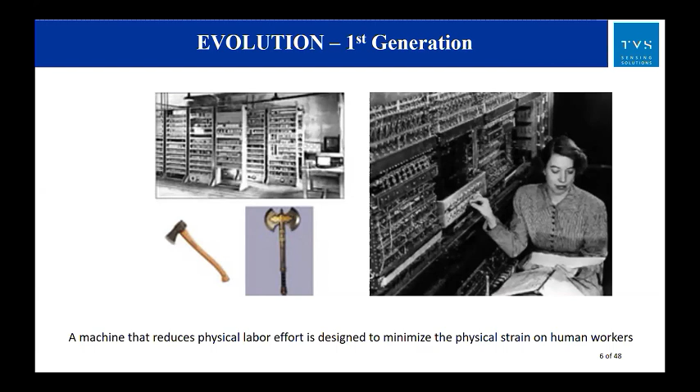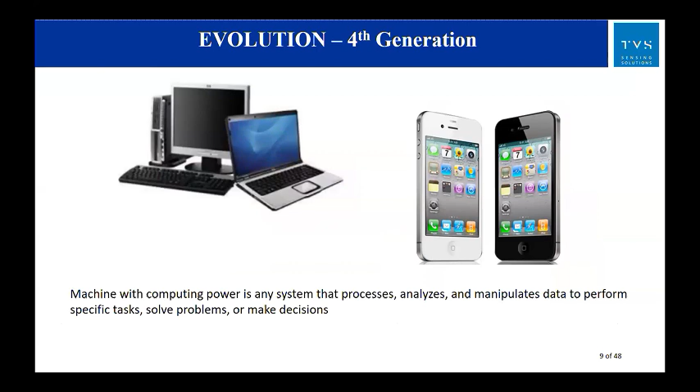Fourth generation, where we are very familiar with machines with computing power, is any system that processes, analyzes, and manipulates data to perform specific tasks, solve problems, and make decisions. I think I need not explain too much on this, we are all very familiar with this area.

Then comes the fifth generation, where intelligent machines are systems designed to mimic human-like cognitive functions. I think this is the era where we belong now. Slowly, things are now being taken over by more robotics, automation, AI, such kinds of things, right? So we are already seeing glimpses of them coming into practice.

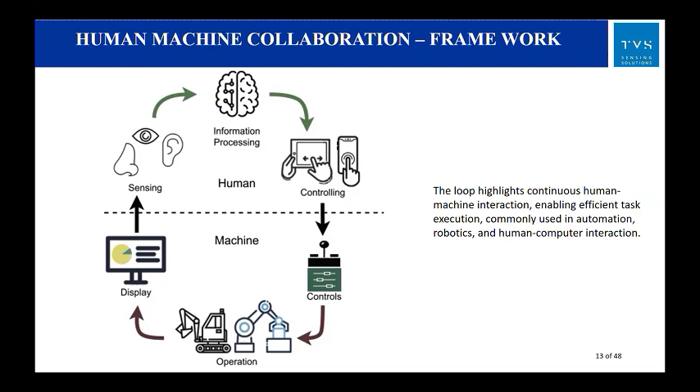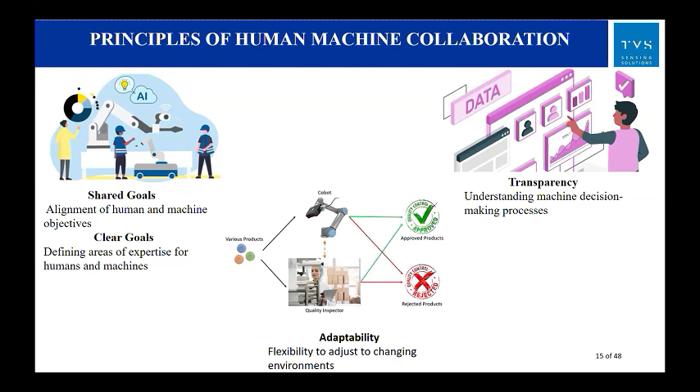In the second portion, we try to understand what HMI is today. We talked about the evolution of HMI, starting from human work, and how machines came in, which led to whatever today we have—all smartphones, touch phones. I think it all started with button phones, right? You would have seen button phones, and from there it changed, and now we are having smartphones in hand today. In future, this can be much more automated than what we are seeing today. This is on the evolution portion.

On the components and principle portion, what are the most important components? We talked about cyber physical systems, and cyber physical systems talk about first sensing, which is called the perception phase, carried out through sensors. Then there is a kind of analytics and other things happening. The third one is the intervention by way of either HMI or cobots, those kind of things.

And the basic principles for HMI, we have seen how the goals should be shared, and it should be transparent, and there should be a kind of alignment. That is very important. With this understanding, let us get into the collaboration of human machine interaction in the real world. I think it's very simple, because this subject is not rocket science. It already exists, and many of us go through it knowingly or unknowingly in our daily life. That's the advantage, so it is very easy to understand. Let us take some examples to understand it better—how does this collaboration of human machine interaction happen in society?

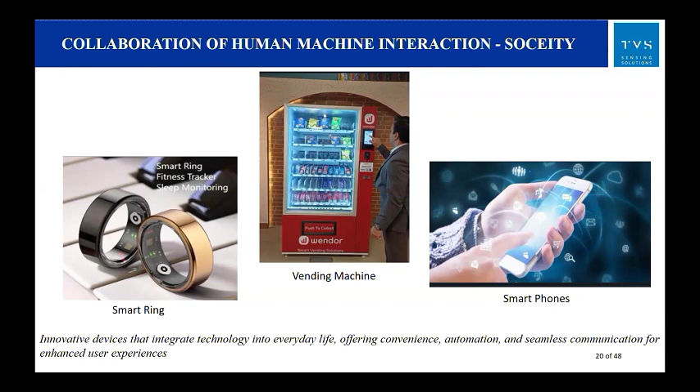Let us see some more. Already you see in Amazon, Google, this voice assistant that is happening. It's also available in cars nowadays. It's possible for you to have these apps, adaptive ATMs, and home automation devices.

There is a weighing scale available in the instrument itself, where by putting in all those ingredients by the quantity showing up on the screen, your complete cooking experience becomes automated. That's the kind of thing that is happening. Already you would have seen that in big restaurants and other places, many things have been automated.

Dosas, today you can print dosa, whatever size you want, you can print dosas. Those kinds of things are coming into picture. So, transform living spaces by enabling seamless control, automation, and interaction through voice commands and smart banking experience.

I think the majority of things I've talked about so far, we're already going through this experience without thinking of them as HMIs. We are going through them in our day-to-day life. I hope all of you agree with me.

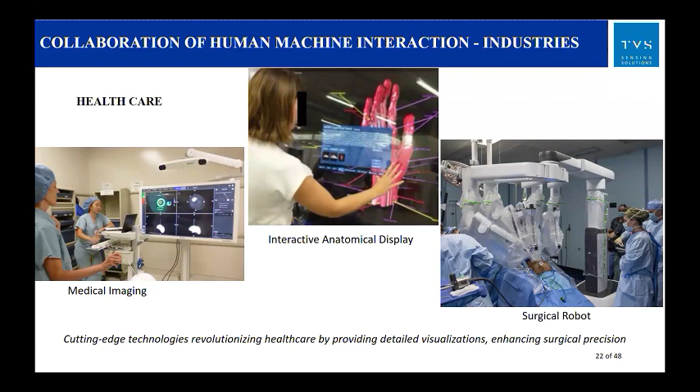Teaching assistance robots are available. This is becoming more and more prevalent in some countries. And I think in India also you would have seen in media this kind of teaching assistance robots coming into play.

Virtual meetings - I think the whole world has learned this post-COVID. The online thing has become part of our life. It has completely transformed the way meetings happen, the way product development happens. Everything changed with these virtual tools. So today we are also meeting through virtual sources. That's all done because of technology advancement.

So innovative technology is designed to enhance learning experience by providing very personalized guidance.

Quality check, augmented reality - in manufacturing now you can see haptics have come into play. For example, if 800 parts have to be assembled for an engine, training a new person for such assembly usually takes years to master. With the advent of haptics, it's possible to train all the assembly procedures, so the learning process becomes quick and as short as possible, so you can understand without even going there.

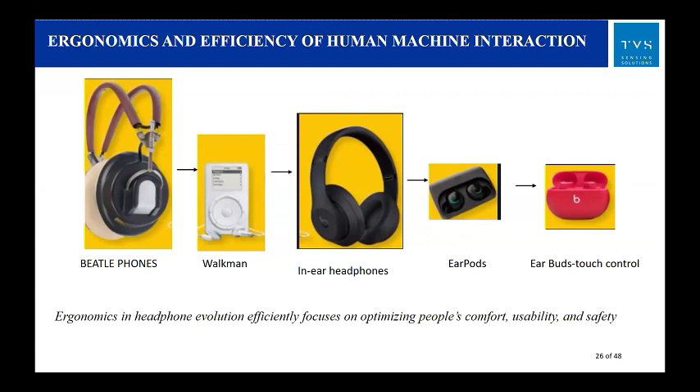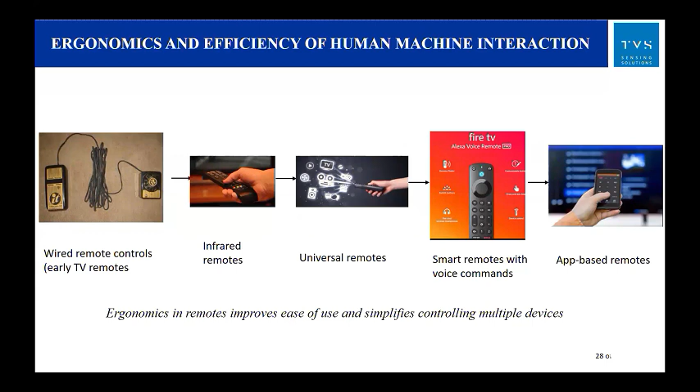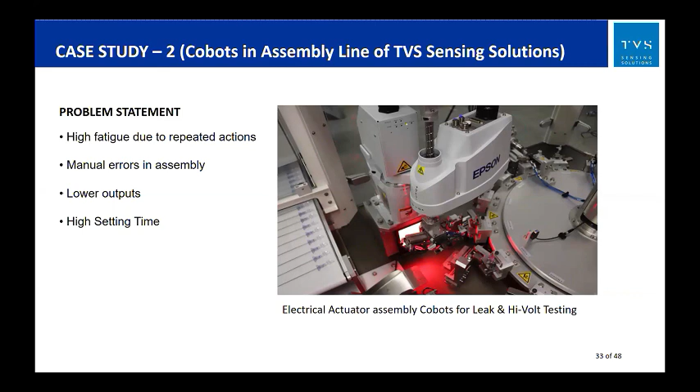So these leak testings have now started using human-machine collaboration. You can see them in the video.

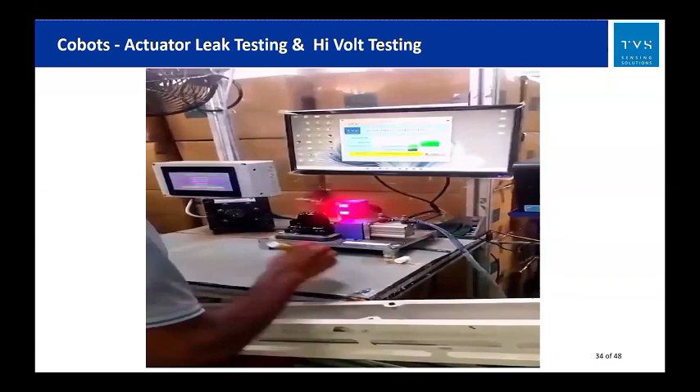This is an EOL tester finally that takes over - previously we used to have the problem of skipping one of those tests, and if that happens, it becomes a problem. Now with the application of these robots, we were able to get better productivity and consistency in output. That's the advantage we got.

We'll talk about one example of a case study related to safety. Nowadays shop floors are becoming more complicated and quite huge, so there are human movements and also vehicles that are moving.

Just like we have opportunities for accidents on the road, there's a possibility of such accidents happening within the industry workplace when vehicles and human beings are moving - there could be a possibility of collision. There are blind spots when you go through huge factories with many walkways, with 90-degree turns where you can't visualize ahead. You can keep mirrors and other things, but there's always a possibility of missing them and hitting humans.

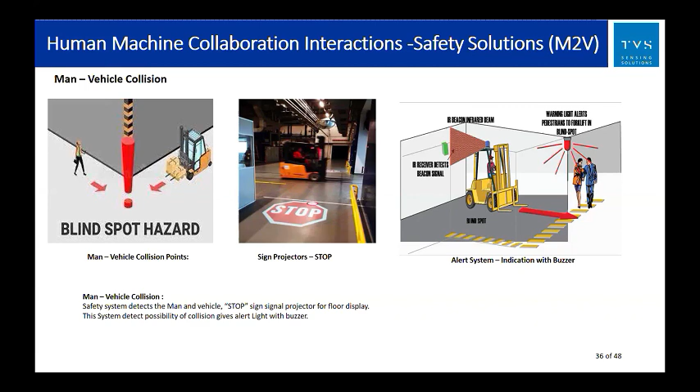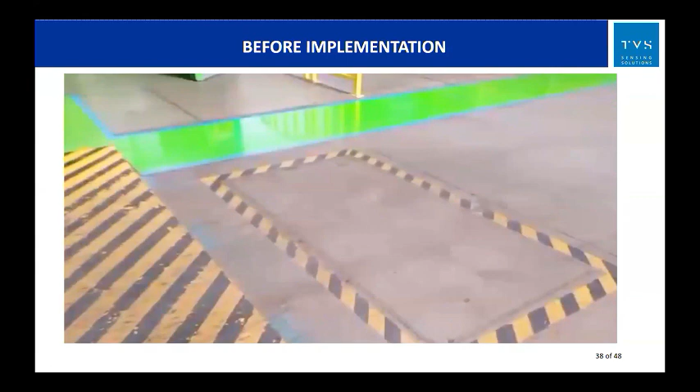Just to show you a very simple picture - this is before you put the alert system. You are moving towards a walkway - imagine you are a vehicle or human being moving on this walkway, and suddenly there is a vehicle coming from the other way. There is a possibility of getting into an accident. That's what happens before deploying this kind of system.

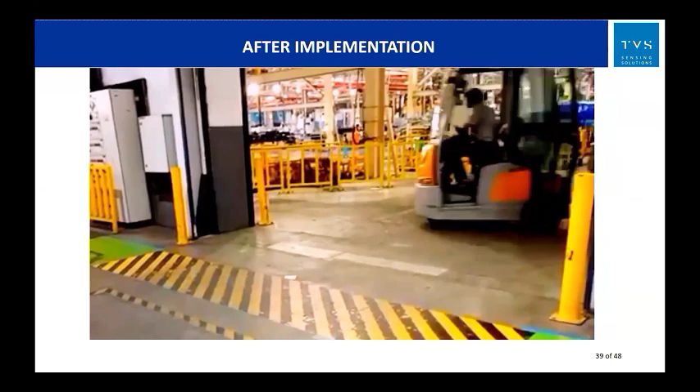Now, if you adapt a kind of human machine interface, you see here - I hope you noticed that when the vehicle is coming, even before you see it, there's a stop visual as well as an alarm that comes up, so that you stop and wait for the other vehicle to move first, then you can make the movement.

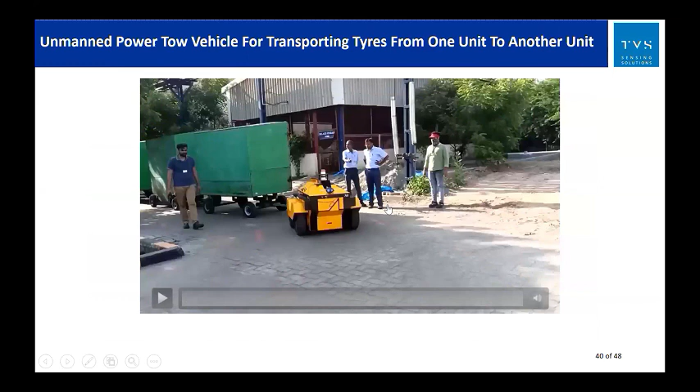There are some other videos being used, just for you to understand how automation is being used. Have you noticed? This is not human - this is manless.

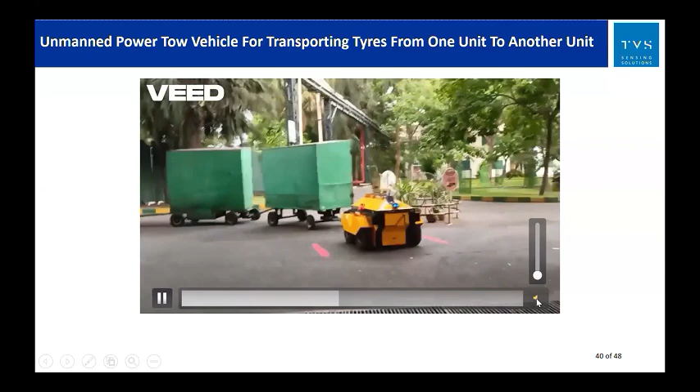You can see that this complete thing is now programmable, so that previously when you had to carry a lot of weight, either humans or vehicles had to carry it. Now all this can be guided automatically, that's the way it is.

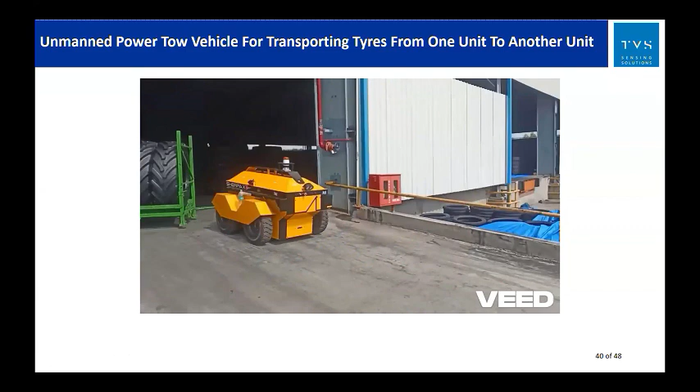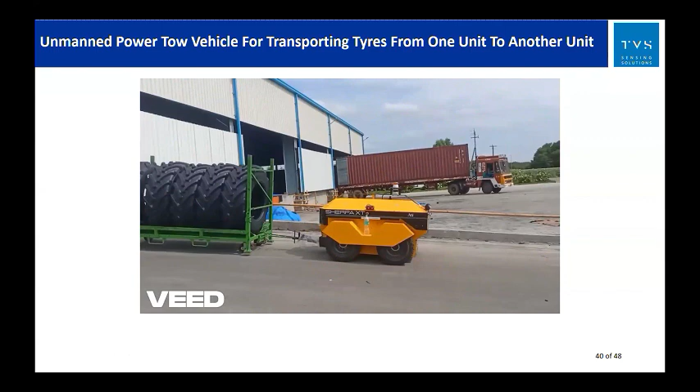It's very interesting that, as I said, wherever there are repetitive jobs as well as heavy weight - in this case these tires are very special, of huge weight. If they have to be carried, it has to be done by a vehicle only, not humans, not possible. But if they need to go from one place to another repetitively, then it is possible to deploy these programmed vehicles, which can go without human intervention - only programming is required, no intervention.

So in conclusion, you can see here how the transport system is taken care of through this kind of HMIs. There's VANET system - V2N vehicle to network, then vehicle to vehicle V2V, roadside units are available, and vehicle to pedestrian V2P. So all these things are being sensed.

So AI based vision systems can enhance industrial safety as well as road safety by detecting and preventing collisions between vehicles and humans in real time. The difference between automation and AI is that AI can explore all possible options simultaneously, and the best option in real time can be picked up and used. It ensures efficient operation by automatically alerting or intervening when potential hazards are detected.

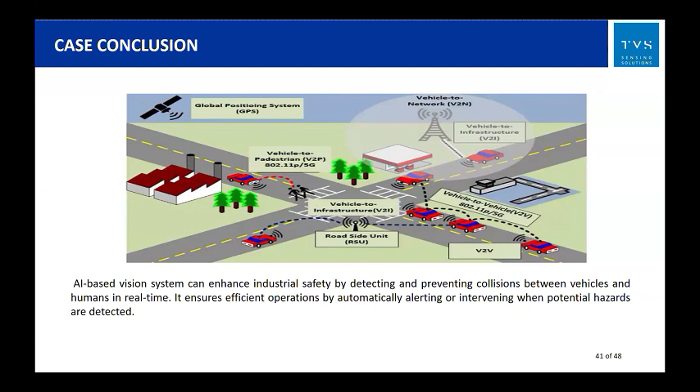I hope you found these case studies useful. Let me repeat: the subject we are talking about today is not rocket science. This has come into existence, and I will not say it has reached a matured state, because with the advent of AI, there is still huge scope available for automation. But for safety and repetitive jobs, HMIs have completely gone to a mature stage.

So what are the future works available in this space? Let us see. Innovation in Industry 4.0 has really created brain computer interfaces, gesture recognition is possible, haptics - with the movement, it's almost like virtual reality.

When we see virtual reality, you feel like you are in a game, you feel you are driving the car, and a similar kind of thing you can do in industrial operations. Assembly, without the machine before you, it's possible to visualize the machine and all assembly operations, and you'll be able to execute. That's what is called haptics.

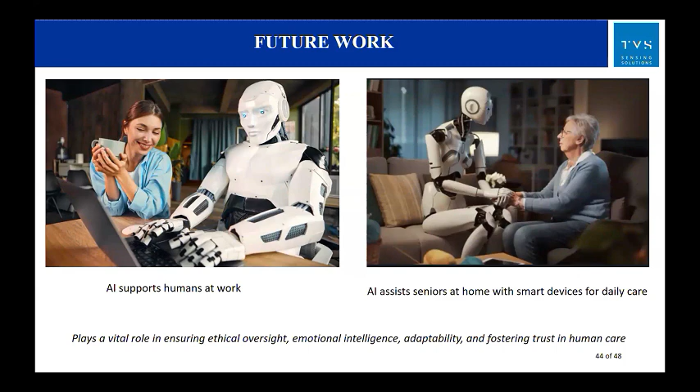This plays a very vital role in ensuring ethical oversight, emotional intelligence, adaptability, and fostering trust in human care.

Dependence on technology, and limitations - whenever we bring any system, there are pros and cons. Over-reliance can reduce critical thinking, and that's happening now. At least in our generation, we were able to remember phone numbers. Today people don't even remember phone numbers because we have them stored. If you misplace your smartphone, you feel miserable - immediately you feel cut off, unable to do anything.

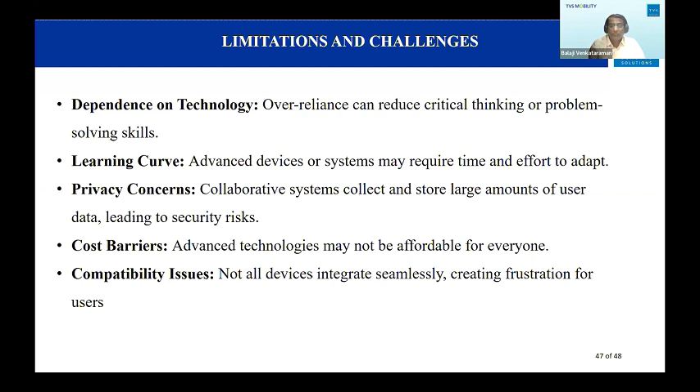I think this is a kind of short presentation now, that's what I have from my side. I'll be happy to take any questions. It's a simple subject - my intention was not to really get into the technology part, but more the application part, so we can understand what a human machine interface is and how it is being deployed into industries, especially.

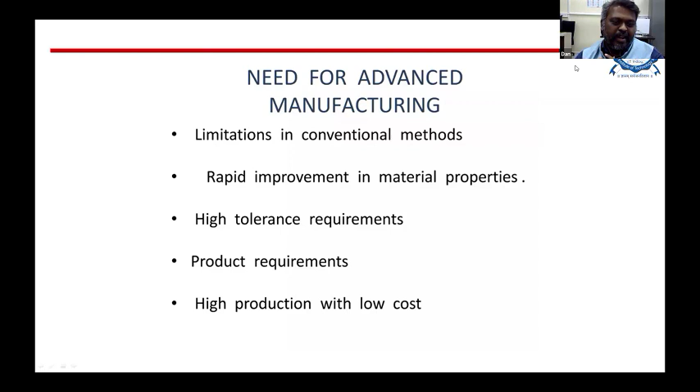So why go for advanced manufacturing? We know we have limitations in conventional methods - we need very high tolerance and product requirements. Also we need high production with low cost, so that's why people want to go for advanced manufacturing. Additive manufacturing is one of the advanced manufacturing processes to fabricate complex shapes.

It is called layer by layer deposition - we deposit the material by layer, then we can make any kind of complex shape. For that, first we need to start with design and idea. You design the component using CAD software - nowadays many CAD softwares are available to draw this. Whatever the model, the software itself converts it to machine language, then it is given to the 3D printer, which directly prints whatever component we want. We have design freedom, and whatever complex shape we want we can easily make it layer by layer.

Nowadays almost any material can be processed by 3D printing. This is the broad classification of additive manufacturing technology. Based on raw material, we can make three different groups: liquid based, solid based, and powder based. In liquid based, mostly polymers and plastics come under this. Again in liquid based there are two types: melting and polymerization. Based on polymerization, there are technologies like stereolithography, polyjet - these are certain 3D printing technologies.

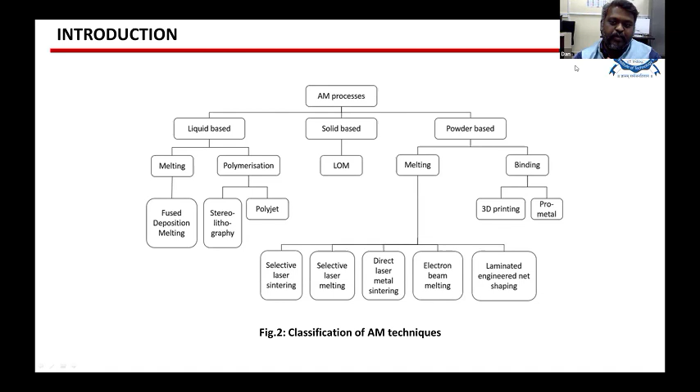If you come to solid based, LOM is there. If you come to powder based, in case of melting there are different techniques - all related to laser, like selective laser sintering, selective laser melting, direct laser metal sintering, and electron beam melting. These all come under powder based processes, and binding also we can do that. So these are certain classifications.

Why we have to go for additive manufacturing is it is one of the key components, one of the pillars for Industry 4.0, because it produces very less weight, the wastage of material is very less in additive manufacturing, and also we can decrease the prototyping time and cost. Also it may promote business digitalization. We can synthesize the assembly - no need of assembly process, we can make it a single part out of it. So these are certain advantages.

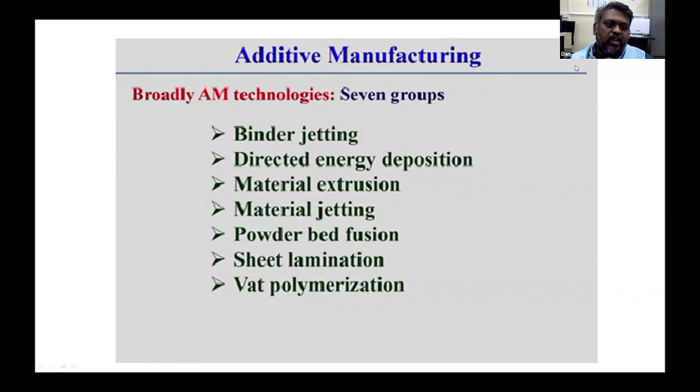These are the broad classifications of additive manufacturing. We have 7 technologies, 7 groups. If you take the first 4, mostly polymers are used, like binder jetting, material jetting - these are all polymers people may use. In case of directed energy deposition, people may use powder based or wire based - both kinds of raw material we can use in directed energy deposition. I'm going to briefly tell you the meaning of this, where we will use this kind of additive manufacturing technologies, then I will show the process. These are certain technologies like powder bed fusion, sheet lamination, vat polymerization.

Stereolithography mainly comes under the liquid classification. Here we use photopolymer resins. The laser falls directly on the resin, curing the material, which then becomes solid. In this way, layer by layer, you cure the material and make any component out of it.

In case of powder-based systems, there are many techniques. One of the most popular is the laser sintering method. You can use any kind of powder here, but the size of the powder should be in micrometers and in a globular shape. Only then can it flow through the nozzle, so layer by layer you can deposit it on the bed.

You can use a variety of materials in laser sintering, such as titanium or polyamide, or any raw material available in loose powder form, which you can use as powder-based fusion or sintering.

In material jetting, it looks like a printing machine, similar to an inkjet printer. It distributes melted droplets of material. Photosensitive material is deposited, then solidified using ultraviolet light. These thermoset photopolymers are used in material jetting.

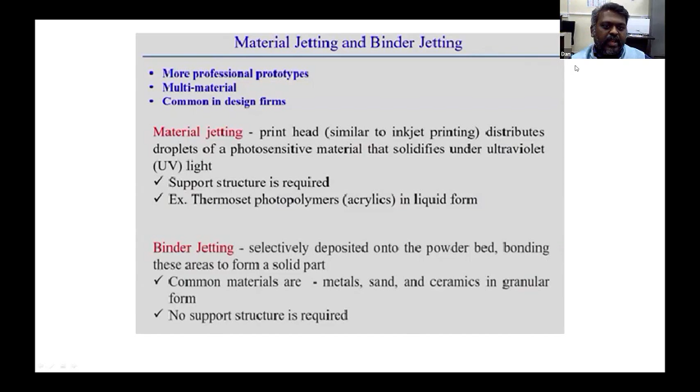In directed energy deposition, there are many classifications, like powder-based processes, and wire arc additive manufacturing also comes under directed energy deposition. You may use a powder or wire as raw material. You have to melt the powder or wire in order to deposit it, so you can use a laser as a direct source or an electron beam. This will melt it and then sinter the layer onto a substrate.

The powder deposition is synchronized with the available heat source, such as a laser or electron beam acting as the heat source. Here we don't need a powder bed fusion setup; instead, the material passes through the nozzle, completely melts, and deposits over any kind of substrate.

If you go for fusion-based techniques like powder bed fusion, you have to take powder in a bed, so a lot of powder is needed for deposition. That is the advantage of directed energy deposition, since it doesn't require as much powder.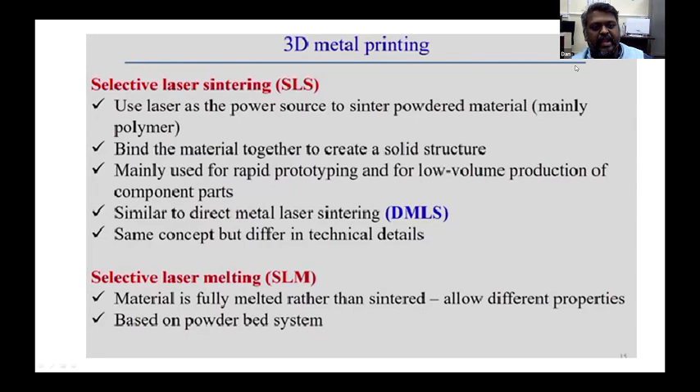In sintering, people don't melt the sample, but in selective laser melting, they do melt it and then deposit it—that's the main difference. In fused deposition, again people don't completely melt the sample; here also the sintering process happens.

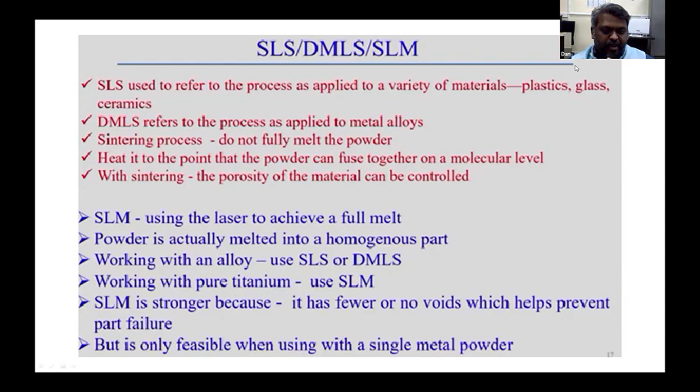In direct metal deposition, you can take material in powder form, pass it through the nozzle, and deposit it. These are all the different types of additive manufacturing technologies.

Wire arc is also one example of direct energy deposition, as already mentioned. In this case, instead of powder, we send wire through a particular feeder, and you can choose any kind of diameter of the wire.

The diameter of the wire can vary between 1 to 3 mm. Based on that, your bead size will differ. I will show it in the next slides.

The advantage of this WAM is basically the deposition rate is very high, and also you can use any kind of robotic arm or machine-based tool. So in that sense, the bed will be very large, and you can do very large components. What I try to say is very large diameter or large sized components can be easily printed in WAM. Also the lead time can be reduced, material efficiency is good, and porosity will be very less as compared to the powder based process. That is the advantage of WAM.

In WAM, what kind of technology do they use? I hope you know the basics of welding. They use the concept where the heat source will be the welding source, generating the arc using electric current, or using some kind of TIG based system or MIG based system. So those kind of things you can use as a source, so you can melt the particular wire and then deposit it over any kind of substrate.

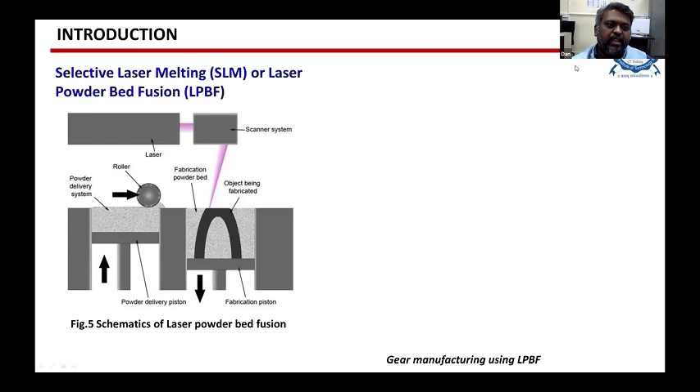So what is laser powder bed fusion or selective laser melting? Here you see the powder is kept in the bed. All of this is the same process. Suppose here they are manufacturing a gear.

You see here all the raw material is powder, kept in the bed. Over it, the sintering process is happening layer by layer. After each layer deposition, the bed goes down, keep on adding layers - it's something like a piston cylinder assembly, the piston going down. Then finally we could make a gear out of it.

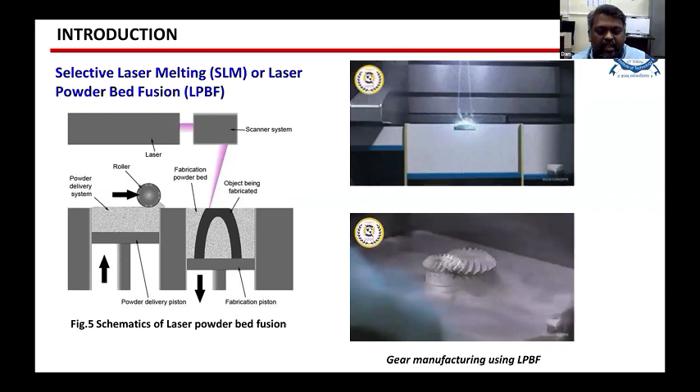So for that we need a large amount of powder in this particular bed - at least 2 kg or 3 kg of powder we have to fill in the bed, in case of powder bed fusion or selective laser melting process.

Basically we use two types of process, TIG based or MIG based. TIG based means tungsten inert gas welding, so tungsten case means the tungsten will act as an electrode, and the raw material will flow from the outside.

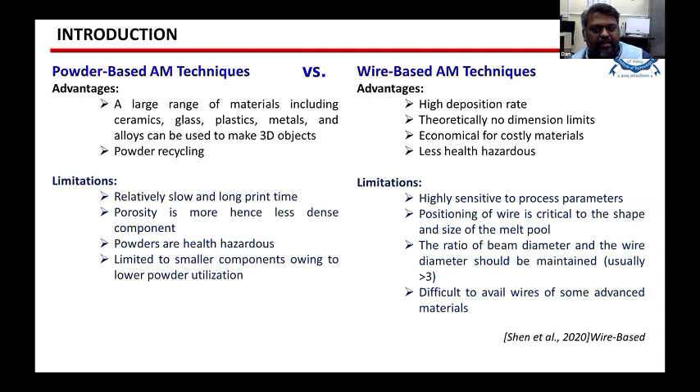Nowadays a lot of materials are available for additive manufacturing, and people are focusing on many different alloys. For example, still people are looking for nickel super alloys, mainly used for high temperature applications. For automobile or aerospace applications, aluminum alloys, titanium alloys, and stainless steel alloys are really popular, and people are still working on these in additive manufacturing. People are also working on high entropy alloys, or multi-component alloys. So in case of metals and alloys, people are really focusing there.

In case of smart materials, mostly people are focusing on piezoelectric materials or shape memory alloys, or some civil structures. People are making 3D printing of homes - nowadays we can create concrete structures and print them directly by 3D printing to make a house. I think IIT Madras made one office room by 3D printing concrete, one of the buildings. It's also very popular in hydraulics and electronics, where people are trying to make multi-material printing connectivities. That's all they are trying in additive manufacturing.

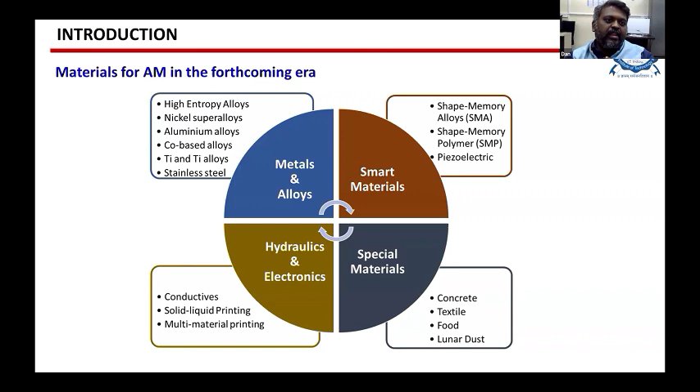Now coming to why we go for advanced materials in additive manufacturing - what is the use of multi-component alloys? I'll present this because I'm mostly going to talk about multi-component alloys. Basically, if you take any conventional alloy, it's mainly based on one dominant element. For example, if you take steel, iron will be the major proportion, and it may have other components like magnesium, manganese, or carbon in minor proportion. So mostly in conventional alloys, one or two materials act as principal or dominant elements, and remaining elements are added to enhance particular properties.

But in case of multi-component alloy, all the elements act as principal elements. For example, suppose you're taking a four or five component alloy - cobalt, chromium, iron, manganese, nickel - this is five components. If all are near 20 percentage each, that is called a high entropy alloy. Usually these alloys have five or more principal elements.

This atomic percentage can vary between 5 to 35%. Initially people said it should be near equiatomic, meaning if you're taking five components, each should be 20%. But in order to enhance design flexibility, people tried making it so if each component is between 5 to 35%, it is called high entropy.

So this is the basic guideline. I can also show you about...

I already told that if you increase configurational entropy, that decreases Gibbs free energy. Because of that, it forms very simple structures. You may expect multiple crystal structures in a multi-component system, but usually these multi-component alloys give very simple, stable structures like BCC, FCC, or different kinds of FCC or B2 phase. Because of this stable structure, we get very different properties from this particular alloy, due to core effects compared to conventional alloys.

So I already told about this configurational entropy effect, and how it stabilizes the structure.

Next, when you mix many elements, the atomic sizes are different - each element has a different atomic size. This usually gives a very distorted or strained lattice in the system, and because of this strain, the strength of the system increases.

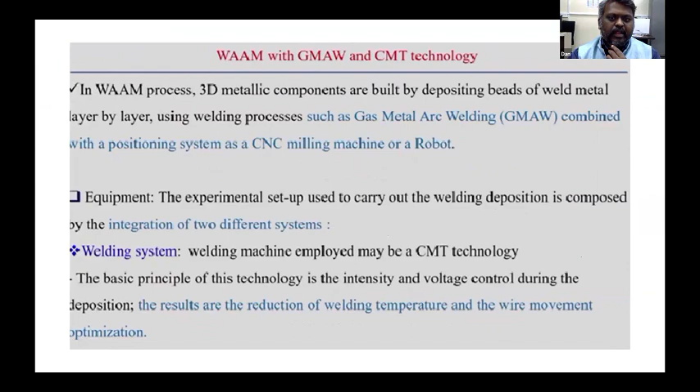So I hope you got some idea about what is high entropy, right? I think up to this it is visible, and I hope you got the idea about what high entropy is.

It is nothing but what I try to say - a multi-component alloy. Why it is very popular nowadays is that these alloys form a very stable structure and also a particular crystal system. Because of that, you can easily improve the property of this particular alloy. I also told about certain core effects - compared to other conventional alloys, it has certain inherent properties, so you can get very good structural and functional properties out of it. That's what I try to say.

Now coming to our own work - we are not working with this 5 component system. We wanted to go down a little and start with the medium entropy alloy. Medium entropy means we have taken 3 components - cobalt, chromium, nickel - in equiatomic proportion. Then we tried to see this property, and this alloy is really popular because it gives better properties than some 5 component alloys. That's why we tried to manufacture this particular alloy through the additive manufacturing process.

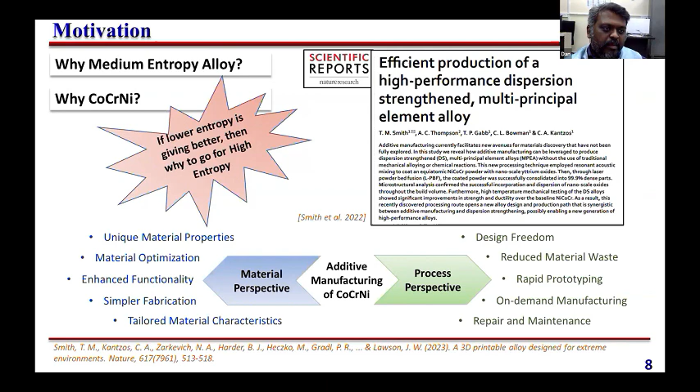Okay, I will show the laser-based direct energy deposition process we did in this particular alloy. I would like to show that study.

So why we started this alloy: when we began the work, mostly people studied only this 5 component alloy, trying to deposit it through additive manufacturing. They tried cobalt, chromium, iron, nickel, manganese based HEA, or other 4 component systems. They understood certain mechanisms, but still a large gap remained. They only studied the as-deposited sample and never did any process parameter changes or studied mechanical properties in depth.

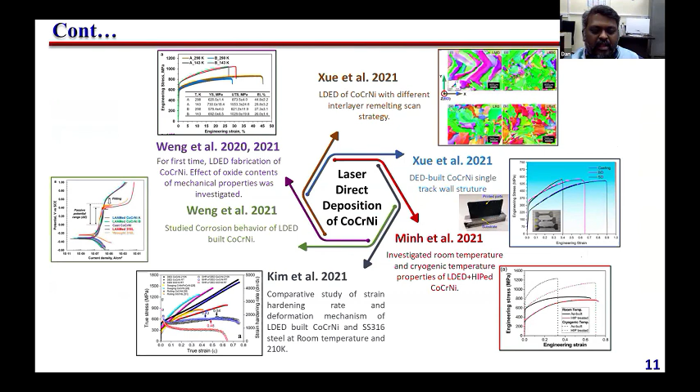So from that point of view we started this particular research. Basically, they never changed any process parameter, and never did any modification in the alloy system. For example, you can vary the composition by changing the atomic proportion, but people never studied this.

Also people never looked into post processing techniques. If you go with additive manufacturing, usually you have to do some post processing like heat treatment or surface modification, because usually you won't get a smooth surface after additive manufacturing - you have to process it. People also never studied corrosion properties or corrosion fatigue. So from that point of view, we started this work.

So this is basically our research objective for this particular alloy. We tried to optimize the process parameter through the LDED process. We did microstructural and nano indentation studies. At the macro level, we did microstructural study by SEM, TEM, EBSD - these characterization techniques - and also at the nano level, we did nano indentation study.

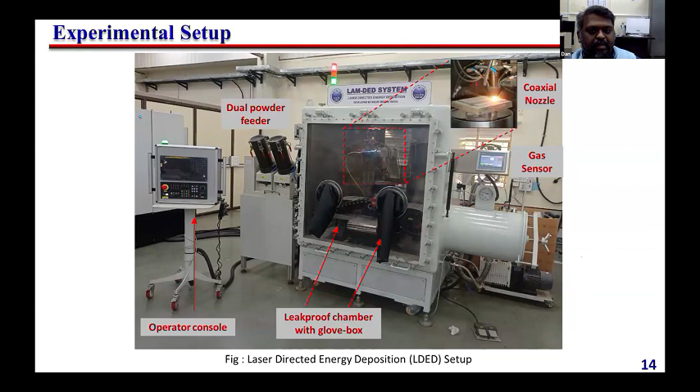Now coming to how we did the deposition: initially we pre-mixed all this powder - we took cobalt, chromium and nickel, these three powders, and you can see it is in spherical shape. We took it in a near equiatomic proportion, each around 33 percent. All the powders are around 50 micrometers in size.

These are all the parameters we used. There are different laser powers we tried, and also different scan speeds in the DED system. We varied between 700 to 900 watt, and scan speed we kept between 0.3 to 0.7. The remaining parameters like powder feed rate, gas flow rate, and stand-off distance we kept very similar.

This is the first raw material we have taken as a powder. Then we deposited it. As I mentioned, we vary the laser power between 700 to 1000 watt, and also vary the scan speed. This is basically deposited over the substrate as this particular sample.

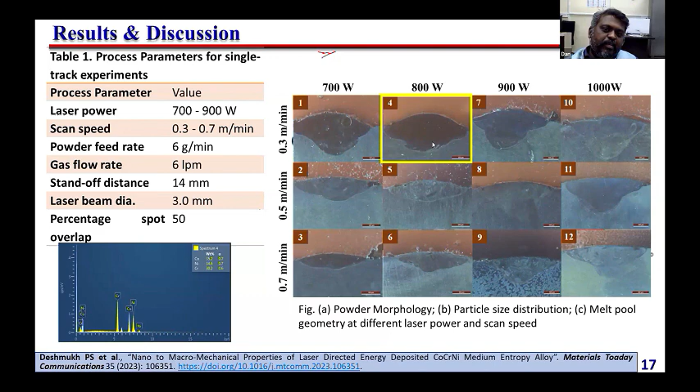Here you can see the bead of this particular deposited sample. Based on the porosity and the bead height aspect ratio, we decided that this fourth parameter is giving better bead height and width, and also lower porosity levels. So that particular laser power and scan speed we used for the deposition.

We deposited layer by layer, and could deposit at least 20 to 30 layers. We also took samples in different directions, which we call the scanning direction and the building direction. Along both directions, we characterized the microstructure by EBSD.

When we look at the EBSD, what we understood is that in the scanning direction, in most cases the grains are elongated, with a very coarse structure. But in the building direction, almost all the grains are columnar, grown epitaxially, and interestingly the texture is really very different.

In the building direction, the texture shows almost the same color, meaning all the grains are oriented in a similar orientation. This texture will also play a very important role in the structural or functional properties.

Hope you may study it. So here the texture is really very uniform. Sometimes we need a specific texture.

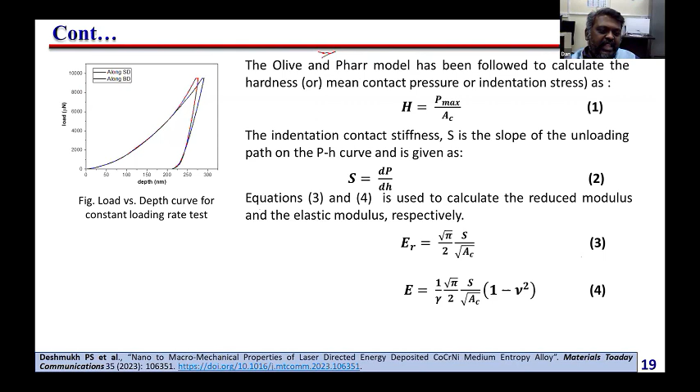So that's what we get in the as-deposited sample. The building direction gives a very coarse structure with epitaxial grain growth. Now we try to see inside the grains, through nanoindentation.

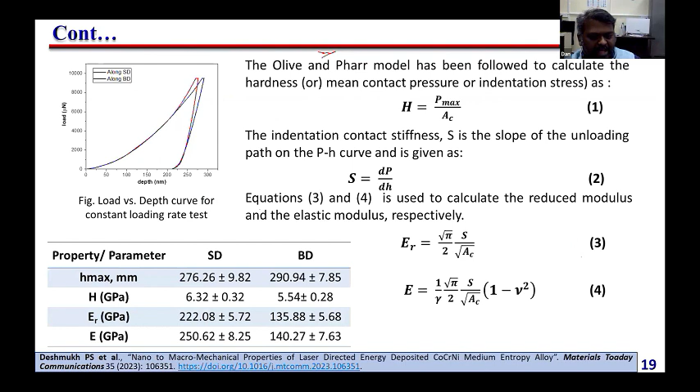We did nanoindentation to see the hardness property. It is not varying much with respect to different strain rates, or with respect to different directions like scanning or building direction. It is something like 280 and 290, not much difference. We got almost similar results.

We also tried the strain rate difference in hardness, and we are not seeing much difference. The strain rate sensitivity is much less, around 0.04 or 0.03, which is very typical for this multi-component alloy. Usually such alloys show very low strain rate sensitivity, and the activation volume is also very low. For conventional alloys, this activation volume is in the range of thousands of B-cube, but for high entropy alloys, it's in the range of 100, which is what we observed in this medium entropy alloy too.

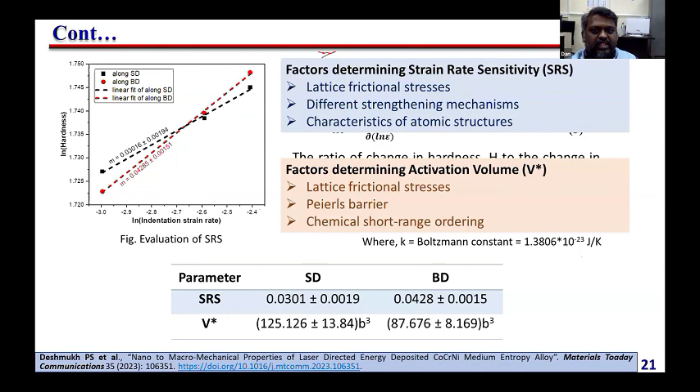These factors mainly contribute to this, which we determine from the outcome of strain rate sensitivity and activation volume. Basically, the chemical short range ordering in this alloy plays an important role, along with Peierls barrier and lattice friction stress. These are all things playing an important role, which is why we get a very low activation volume.

From this particular deposition, we could optimize the laser power and scan speed for this sample, and we understood that there is a predominantly preferred 001 texture in the building direction.

That is mainly due to the thermal gradient, because layer by layer when we are going, the heat will keep on accumulating. That will create some kind of thermal gradient, and that's why it leads to the epitaxial grain growth mechanism.

We also did some nanoindentation, so we got this strain rate sensitivity and lower activation volume. The reason is mainly due to short range ordering, right? So that's what I told. This is from the first study we got.

So now for the second study, our objective is to change this scan pattern. We try to rotate the scan pattern. Like in the previous case, the scan rotation was not changed - it was at 0 degrees, meaning layer by layer it would deposit in a similar orientation. But in this case, the scan pattern will rotate.

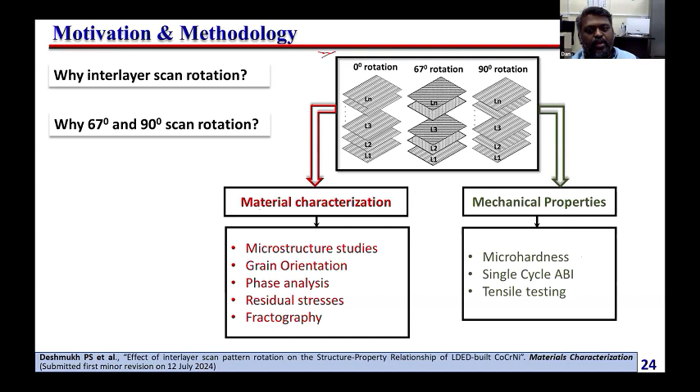We did it in 3 different conditions. We rotated the scan, which is called interlayer scan rotation. We used 67 degree rotation and 90-degree rotation. After one deposition, suppose 90-degree rotation means the second deposition will be rotated by 90 degrees, so each deposition keeps rotating by 90. So the cooling rates will change.

Basically the thermal gradient won't be affected the same way. Our main objective is how we can reduce this epitaxial grain growth. Even the substructure shows too much epitaxial grain growth.

So when we did this 0, 90 and 67, we understood that the 67-degree is the best. The 67 is giving a very fine structure compared to 0 and 90-degree. We did multiple images and tried to measure this substructure. We understood that the finer structure we got is in the 67 degree, and the epitaxial growth is also suppressed or reduced in the 67 degree scan rotation.

Also if you see the EBSD, we can understand the microstructure and texture. Already I told, for the first case, the 001 texture is forming as preferred orientation, but 67 and 90 form a very refined structure compared to 0. 67 and 90 have a very refined microstructure. Also the texture is quite different - there is no strong texture forming, and different kinds of 111 or 101 fiber components were found.

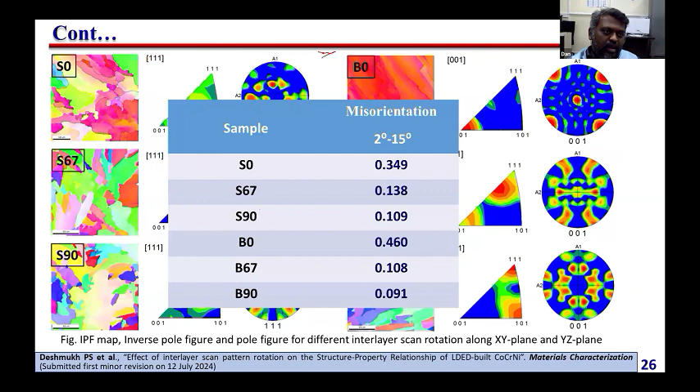These are all the misorientations. The misorientation is also less compared to the 0 degree rotation. Already I told the cooling rates are much better, so that's why the misorientation is reduced here.

We also did some phase analysis. In all cases, it is forming an FCC structure. There is no change in any phase - it is forming a single phase FCC.

We also did some kind of automated ball indentation test, something like a hardness test only, so you can understand how much maximum energy is absorbed in the particular sample. We can understand this by using this ABI.

Usually this 67 is giving almost a similar kind of energy absorbed compared to other orientations. For the 0 degree, there is too much difference in the displacement. That's what we understood.

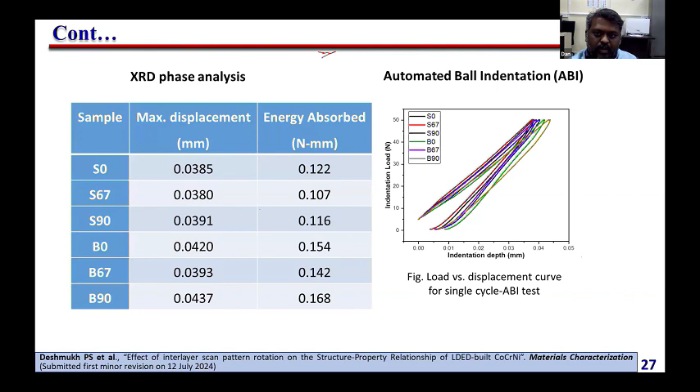Also if you take the mechanical properties, for example in the scanning direction versus building direction, it is totally different. In case of scanning direction, it gives better yield strength, but ductility is very less. In case of building direction, the ductility is much higher, but strength is less.

If you go for 67 and 90, in almost all cases the strength is increasing. The 67 gives better results, even 90 gives better strength, but in terms of isotropic property, the 67 is giving better results. So we are getting better results from the 67 sample.

So by using this different scan strategy, what we understood is we could control the microstructure and texture both.

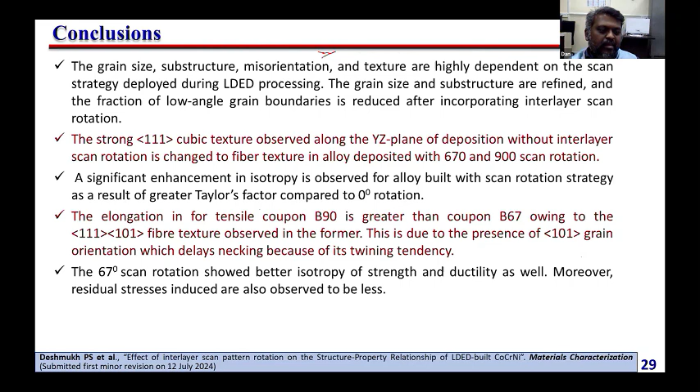These columnar grains are totally reduced in the 67 degree scan rotation, and we were also able to change the texture. In B90 we observe the 111-101 fiber texture, or other fiber textures, but there is no strong cubic texture present in the 67 sample. So basically this 67 scan rotation gives better strength and ductility compared to the other cases. Okay, that's what we understood.

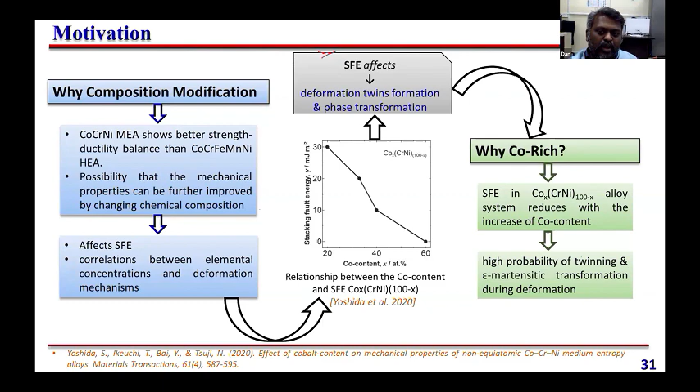In the final, third case, we try to change the composition. We try to see how changing the cobalt content affects the microstructure, texture, and properties in this laser additive sample. We wanted to study cobalt addition because changing cobalt varies the stacking fault energy of the sample. When you change the stacking fault energy, the probability of twinning and some kind of phase transformation happens during deformation. That's why there is a high probability of twinning and martensitic transformation when you go with a cobalt-rich sample.

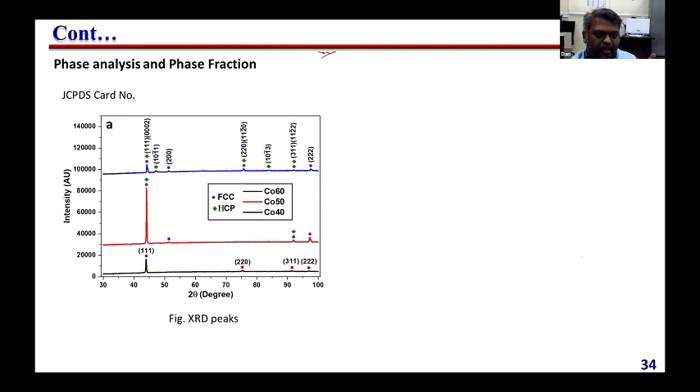That's why we tried to increase cobalt up to 60%. In the equiatomic case it is 33%, but we wanted to go for 40, 50, 60. When you increase the cobalt content, there is a complete transition in the substructure. When you increase to 60%, the substructure is totally refined, down to a few micrometers. Also, as you increase this composition, other phases appear, like martensitic phases evolving at 50% and 60%, while up to 40% it remains single phase FCC.

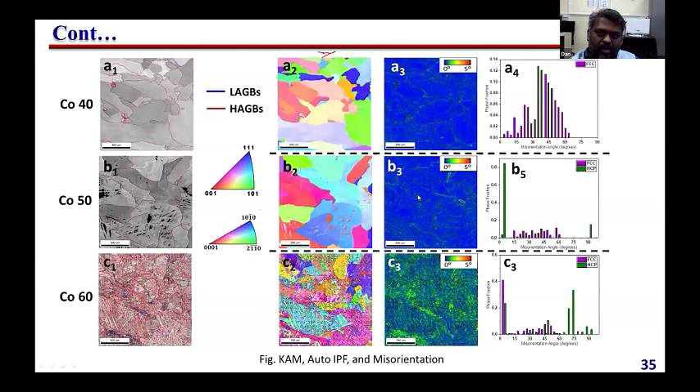We also separated out the different phases to see how the texture changes in each phase and what kind of texture forms. We did all this texture study, and we also looked at the properties.

When you increase this cobalt proportion, usually the strength is enhanced, but at the same time the ductility goes down. The equiatomic 33% composition gives better ductility with good strength. At 40%, the strength is really good compared to equiatomic, but the ductility drops. At 50 and 60%, even though you might expect very high strength, you get very low ductility, and the samples end up breaking.

The samples are broken, mainly because of this transformation. The martensitic transformation is basically dominating, and because of that, the samples don't behave like a ductile material. You can also see this in the fractography images, which we took after the tensile test.

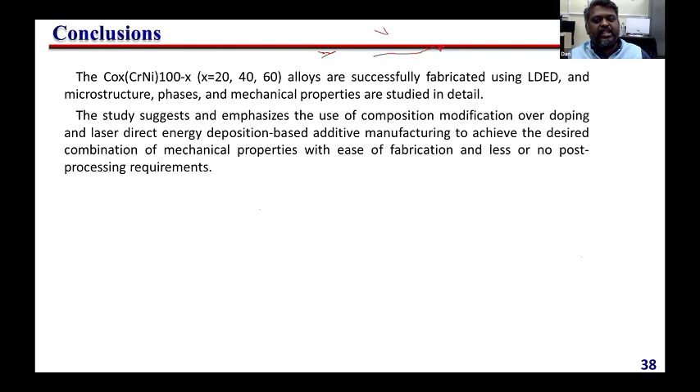So by using this compositional modification along with this advanced manufacturing technique, we can combine both to improve the mechanical properties with ease of fabrication, and there is no need for further post-processing. That is the advantage of this compositional modification.

Now I'm coming to the fourth study: laser shock peening. Before going into that, you should know what laser shock peening is. I need to show certain images so you can understand how this laser peening works.

Okay, I hope it is there. So what is the basic phenomena that will happen here?

Suppose the laser beam is bombarded over your particular sample, that will give some kind of high energy plasma. This laser beam will give a high energy plasma, and when it hits or bombards the material, it will convert into a very high energy shock wave that induces into the particular material. Because of that, it may refine the material, or it can cause phase transformation also. Mostly it will induce a microstructural refinement. So that is the main idea of doing laser shock peening.

There are some other methods also. People use this SMAT process, the mechanical attrition process, where they use steel balls to bombard over the surface, then they induce a shock wave. Like that, here we are using a laser beam, high energy plasma, then converting this high energy plasma into a shock wave, then refining the structure.

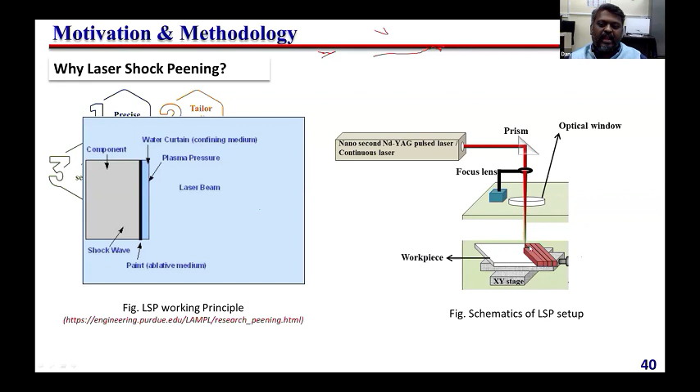For this purpose, basically an Nd-YAG pulse laser is used here. By using this, we can automate this process also. Suppose if you have the CNC stage or XY stage, you can move the sample with respect to XY direction, then layer by layer you can do the peening. So that's what it is, basically to modify the surface property.

So here basically we did some different kinds of shock peening. Before going to the result, maybe I should show what kind of mechanism will happen.

Then you may understand about this, how we can... Are you able to see this slide? Any of you please tell me. Yes sir, but it has to be in view mode, slide show mode.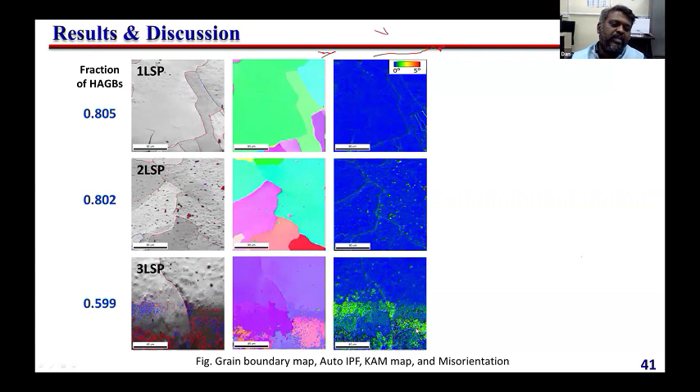When you go with two LSP cycles, some dots appear, which is basically a refined structure. But when you go to the third, three cycles of LSP, a large amount of low angle boundaries are formed, meaning there is large refinement and strain formed. Because of that, we could get a different property out of it.

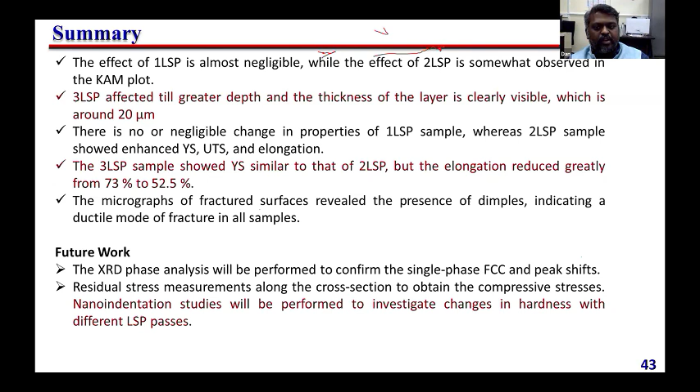So we could increase ductility and also strength. The elongation is greatly reduced. Also, from the fractography study, we understood that all of them are forming a dimple structure, so the mode of failure is a ductile failure. That's what we understood.

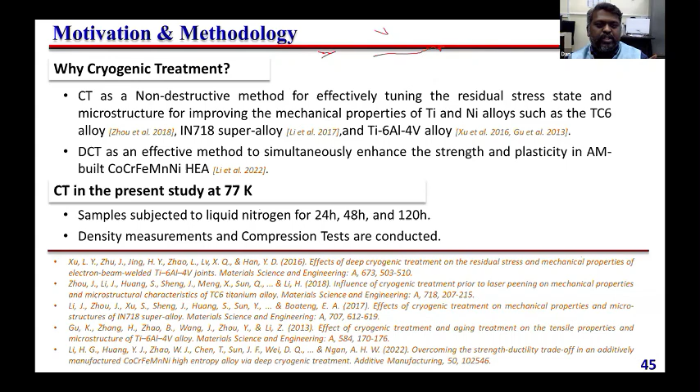So I can also show some kind of post-processing technique. We did some kind of cryogenic treatment for different hours in this particular sample, to see if there is any change or not. This also acts as a microstructural refinement. When treated at cryogenic temperature, this usually induces a residual stress, and then you can increase the properties.

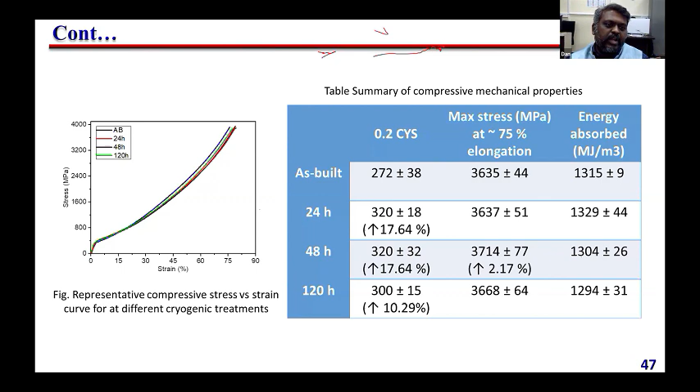So in that way, we did different hours of cryogenic treatment and tried to see the properties, but we did not see much difference. At least 17.64% enhancement in the yield strength, that's what we could see, but there is not much difference in the energy absorbed or elongation. That's what we understood from this cryogenic study.

So overall, what we understood is that initially when we are doing deposition, the grain structure is different and it forms a preferred kind of texture. But when we change the scan strategy, it gives better results than the as-deposited sample. As compared to the 0 degree scan rotation, 67 and 90 degrees both give better properties, and 67 gives better isotropy in case of strength and ductility. Also, when changing the composition modification, we got different phases.

Also, when changing the phase, we can only go up to 50%, like only up to 45%. When you cross 45%, the sample becomes brittle. That's what we understood, because of this too much transition, which leads to a crack.

Also, from the laser shock peening study, we could understand that at least 3 LSP cycles are needed to improve the property. After 3 LSP, we got a heterogeneous microstructure with enhanced strength. Cryogenic treatment doesn't give much difference in the result, but there is a change in the yield strength that we observed. Residual stress also changed, which we still need to check. So that's what we understood from this case study.

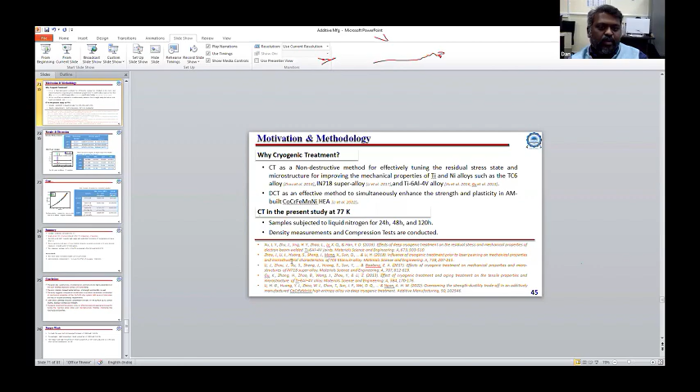Sir, for additive manufacturing, which process is better for biocomposite material manufacturing? Which is very suitable for biocomposite - nowadays people are doing fusion jetting. Many people choose based on your application, what kind of structure you have to produce.

Nowadays many people are using this. What kind of material did you mention? Natural fiber plus biocomposite, for research purposes. Okay, yeah, that's what I told initially - one or two types of this.

Mainly it is used for the polymer. You can use a polymer-based technique actually. Okay sir, thank you.